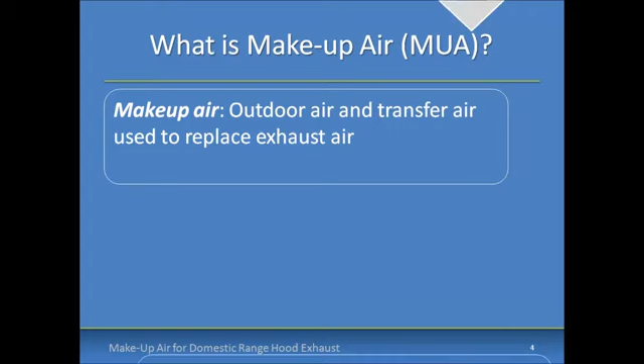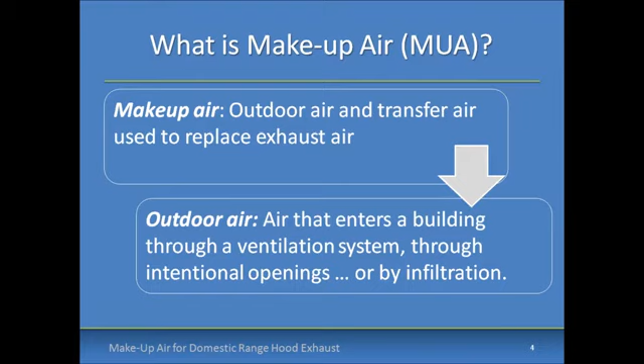So what is makeup air exactly? I'm guessing you have some understanding if you're on the call today. Based on paraphrased definitions from the 2012 International Mechanical Code, which has the most comprehensive definitions of any model code, makeup air is outdoor air and transfer air used to replace exhaust air. This leads to the next question: what is outdoor air? Outdoor air is air designed specifically to enter the building through a ventilation system, through intentional openings, or by infiltration - so outdoor air can be intentional or unintentional in its entry into the building.

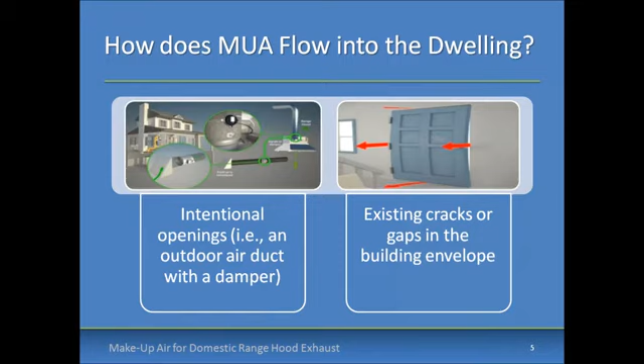When we talk about how it flows into the building, there are intentional openings, such as a makeup air damper designed specifically for this application, which could be integrated with the range hood. Then you have cracks and gaps that exist around doors, windows, and other openings in the building, where air can enter from outdoors based on pressure differentials across the building envelope. Here's a schematic of what you might see from a design perspective as far as where makeup air comes from.

That's a question we often hear.

The blue arrows here represent the outdoor air, so you can see cracks and gaps around doors and windows, and also an intentional makeup air opening, in this case located in the kitchen. And transfer air, meaning air can enter from other spaces in the house that communicate freely with the kitchen range hood and flow into that area based on pressure differentials and natural movement of air.

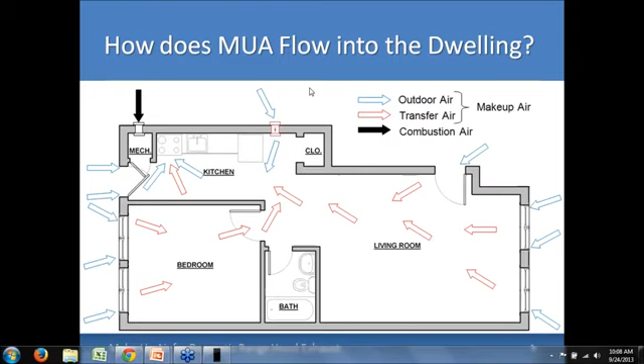I also have combustion air called out here with this black arrow directly into the mechanical room, and just wanted to point out that that's definitely different than makeup air. We want to keep those separate in general to ensure that the mechanical equipment has sufficient combustion air for its needs.

Another poll for just a second here: why provide makeup air? I'd like to see some feedback from you on this and what you think as an audience. We'll provide some more information in just a second, but before we really get into it, just wondering what everyone out there thinks are the reasons to provide makeup air.

Provide makeup air: you've got to meet code requirements. If you're a builder or contractor, you're acutely aware of that. It's important to minimize the chance of excessive depressurization, which if unchecked could lead to backdrafting of combustion appliances, extinguishing of pilot lights that might exist on old combustion appliances. Underperformance of range hoods would be another problem that could result from depressurization if makeup air isn't provided in sufficient quantity. Exhaust and sewer gas reentrainment is another one as well.

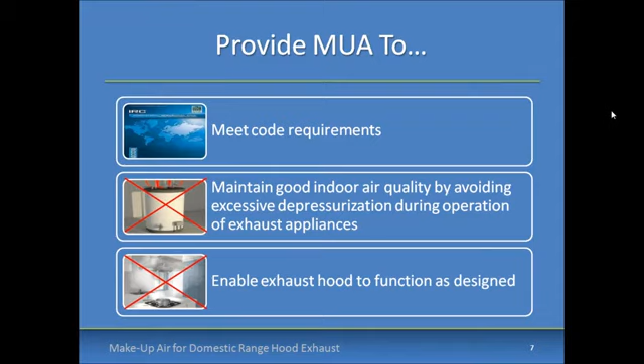So basically, we want to provide makeup air to ensure that combustion appliances and exhausts are in a good position to operate as designed, assuming, of course, that they're installed correctly.

Unless the building's exhaust and supply flows are perfectly balanced at all times, some level of depressurization is likely to occur when the exhaust appliance operates. So what we're trying to do here is not eliminate depressurization entirely, but to keep it at an acceptable level.

Based on recommendations from the Building Performance Institute, the maximum depressurization that's acceptable can be determined as a function of the type of combustion appliance. The most common metric used to measure depressurization is the Pascal. For those of you who aren't familiar with Pascals, 25 Pascals is equal to 1/10 of an inch of water column, so that gives you the conversion there.

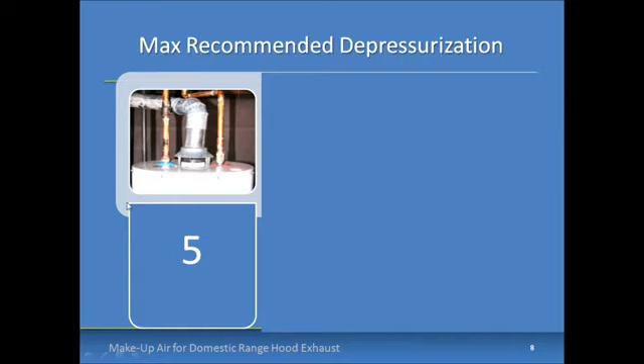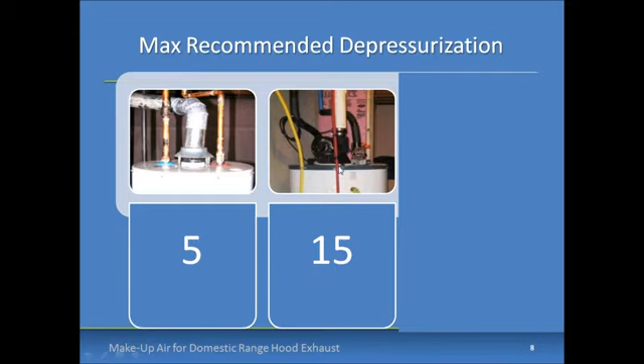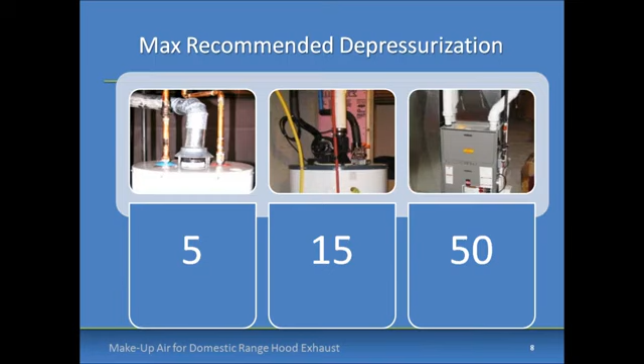For natural draft appliances, what you're seeing here on the left, a maximum depressurization of 5 Pascals is recommended. When dealing with mechanical draft appliances, like this fan assist on the water heater showing mechanical draft, a maximum depressurization of 15 Pascals is recommended. For direct vent or sealed combustion appliances, a maximum depressurization of 50 Pascals is recommended. So 5, 15, and 50 are the numbers I want you to keep in your head as we're going through this for new construction where these appliances are individually vented.

So let's get into makeup air code requirements. Within this webinar, we'll focus on the code requirements of the 2009 and 2012 versions of the International Residential Code, which is the most widely adopted model code in the nation. You can see here on this map where it has been adopted statewide. California, Minnesota, and Wisconsin have state-specific makeup air requirements that we're not going to address today, but these other states have very similar requirements.

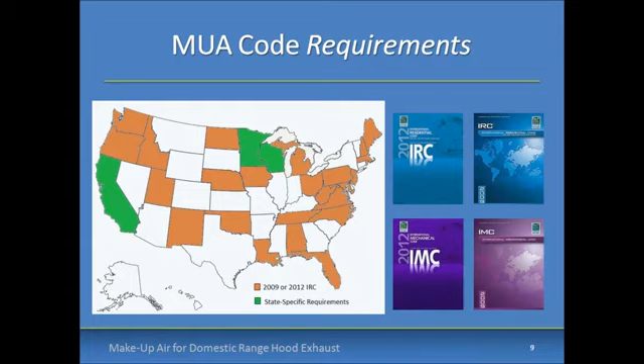The IRC and IMC, International Residential Code and International Mechanical Code, requirements for domestic kitchen range hood makeup air are virtually identical and include three basic components.

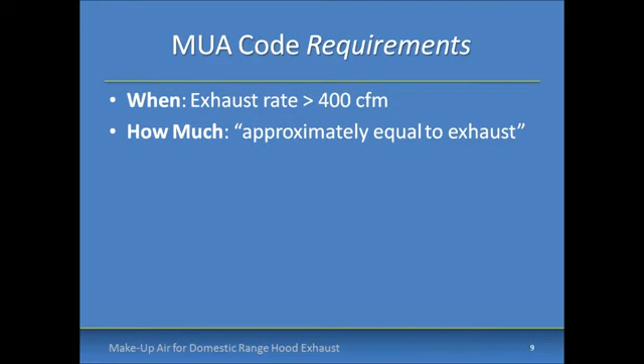First, it's when to provide it, and that's when the kitchen exhaust rate exceeds 400 CFM. They say how much to provide within the requirements as well, and that's makeup air that's approximately equal to the exhaust. And then what you're supposed to include, from a hardware perspective, is a means of closure automatically controlled to start and operate simultaneously with the exhaust system.

So that's what we're looking for here, and all of these requirements can be met by specifying a motorized damper. You're seeing a picture of a Broan solution over here in the right-hand corner, sized to provide the required amount of makeup air when open during operation of the range hood.

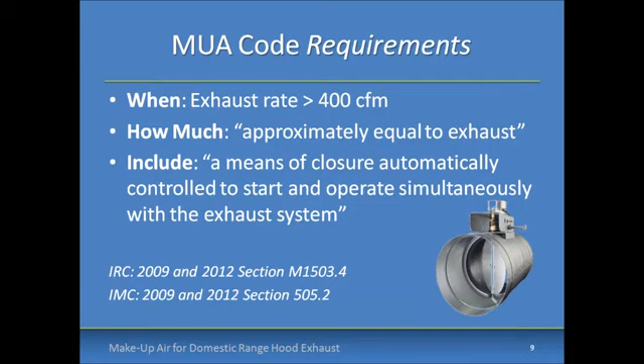So if the makeup air damper is properly sized, the solution doesn't have to be a fan-powered solution. It can just be a passive solution that automatically operates simultaneously with the exhaust system.

So let's talk about gravity dampers for a second. One question we hear from some professionals is, can I use a gravity damper to comply with the code? In short, the answer is no for several reasons. First off, they're not approved by code because they can't be automatically controlled to open with the operation of the range hood. Secondly, they're generally not listed and labeled, so it's hard to tell what pressure differentials they'll operate at.

We reviewed about 30 products from 7 manufacturers available through the nation's largest HVAC distributor's website, and of these, only 7 products were provided with data on the pressure differential at which the damper would begin to open. The average pressure differential required to operate them was 17 pascals, which is over 3 times the recommended depressurization limit for natural draft combustion appliances. So just not a good solution from that perspective.

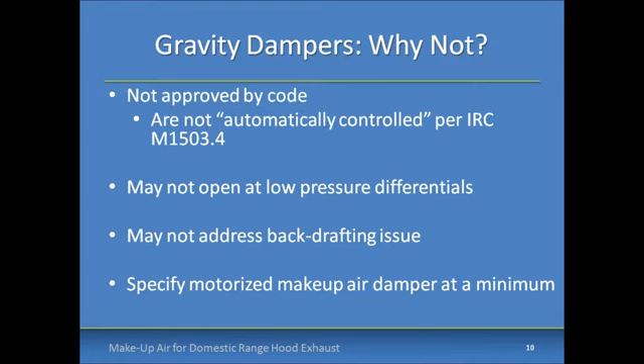And finally, industry sources like ACCA Manual D and BPI note that properly vented combustion equipment can backdraft at very small pressure differentials, like 5 pascals or less, such as we just mentioned. So backdrafting can be a byproduct of specifying gravity dampers where you're not sure which pressure differential they'll actually operate at.

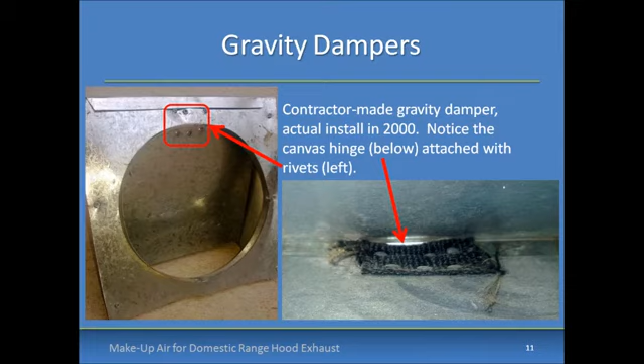Here's a picture of a gravity damper that came from a real install back in 2000. You can see the canvas hinge here with some rivets. Basically, gravity dampers can come in all shapes, sizes, and varieties. So you really can't have a guarantee that the gravity damper is actually going to open when it's needed.

Many of you are aware that while today's webinar focuses on the current regulations, we know that the codes are always changing through public proposals, which are not always for the better. Despite the reasons we gave to disapprove gravity dampers for range hood makeup air, there is a proposal to approve gravity dampers that's advanced past the first round of the 2015 IRC code development process. So if you're a code official, you can vote to disapprove gravity dampers at the public comment hearings next week in New Jersey. For the 10% of you out there that might be headed to New Jersey next week, we just ask that you consider that when you're at the hearings.

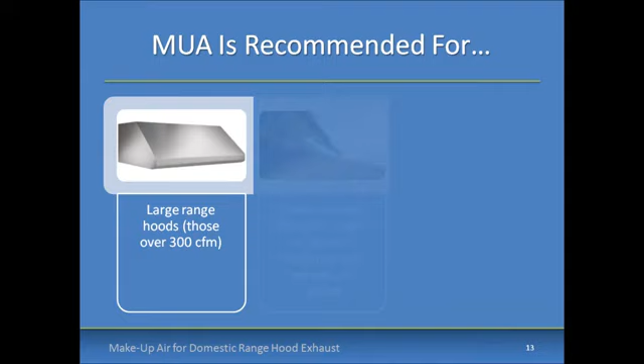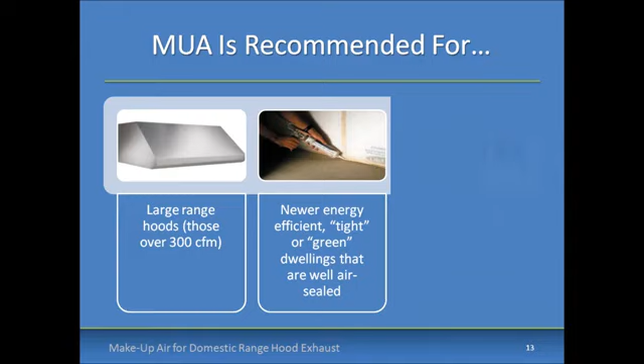So let's take a break from the regulations for a second and look at, in the case that you don't have local code that requires makeup air, what are the manufacturer recommendations for makeup air? Broan, NuTone, and Best recommend makeup air when any of these situations occurs: when the exhaust capacity of the range hood exceeds 300 CFM, if the home is considered to be of tight construction or well air sealed, or if the dwelling has natural draft space heating or water heating appliances located indoors.

So let's get into some installation configurations here, typical configurations permitted by code and options for installers. The first installation option is interlocking the central fan with the operation of the kitchen range hood and the makeup air damper. If those three are coordinated through a system of relays and controls such that when the hood turns on, the makeup air damper opens and the central fan turns on, and the makeup air duct is ducted to the return trunk of the central air handler, then you have a few advantages here.

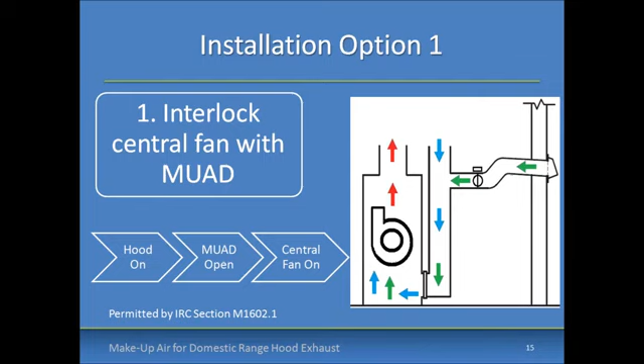You can increase the flow capacity of the makeup air damper by increasing the pressure differential over that outdoor air duct, so you're actually pulling in more outdoor air with the assist of that fan. You can also promote mixing of the makeup air, so there's a bit of tempering before it reaches its final destination in the kitchen, providing a little more comfort for the occupants, potentially, depending on the severity of the climate.

A second installation option would be to just duct the makeup air damper into the return trunk of the central duct system, but not interlock the operation of the central fan. So a little less complicated than the first installation, a little less costly, but you have less tempering at this point than you would before as far as running the air over the heat exchanger. But you do have some mixing going on of the air before it reaches its final destination in the kitchen.

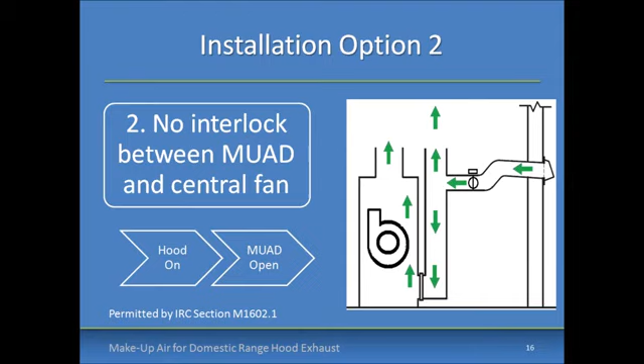A disadvantage is that less flow is provided because you don't have that central air handler to provide the necessary boost. The third installation option is routing the makeup air damper to the interior register,

and not integrating it with the duct system at all. This is the simplest code compliant option, but it doesn't have the advantages of tempering or mixing.

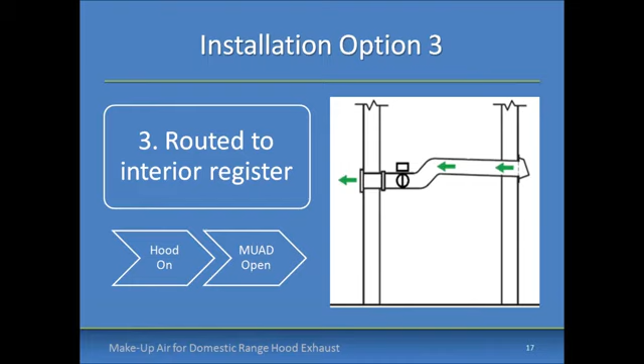If you're using this option, Broan recommends that you don't dump the makeup air right on top of the range hood, because that could result in short cycling of the exhaust air instead of exhausting the actual air that you want.

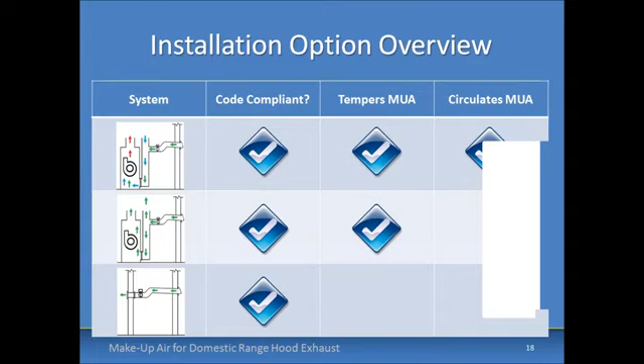So just a brief overview of the three different options that we identified and the advantages of each. You can see that the central fan integrated solution provides the most advantages, but all these solutions can be used for code compliance.

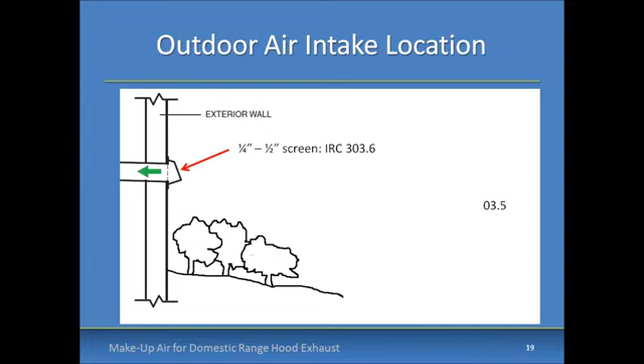Another thing to think about when installing the solution is the outdoor air intake and where that's going to be. These are common requirements within the code that address issues such as screening, clearance, and also location of the makeup air that's being introduced. So don't forget about those code requirements when you're specifying the system.

A little more involved here for you architects and engineers on the call. We're going to address some makeup air theory and building science considerations, which hopefully is of some interest to the others of you on the call as well.

When you're talking about a makeup air solution, we've seen that the code has some very basic requirements for makeup air, but we've also covered several considerations that should be taken into account in designing a makeup air solution, such as the type of combustion appliance and its ability to resist negative effects of depressurization. Is it natural draft, mechanical draft, or direct vent?

Another question is the air tightness of the dwelling. How much infiltration is available for makeup air, and how much needs to be provided through dedicated openings through the building envelope? What about the installation configurations and the boost that you could get through integrating this with the furnace?

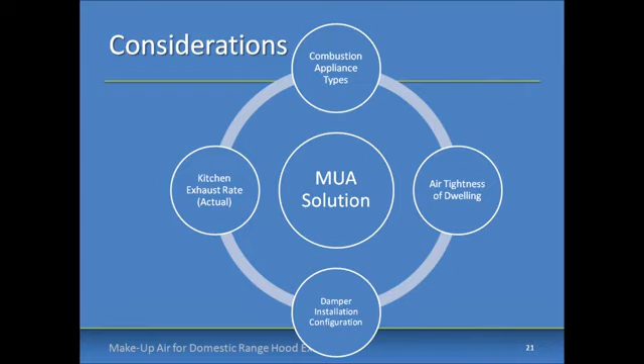And the actual kitchen exhaust flow as opposed to the nameplate rating. The fan may be rated, let's say, at 1,000 CFM, but once you get the ducting in and all the elbows, you might not be providing that total flow.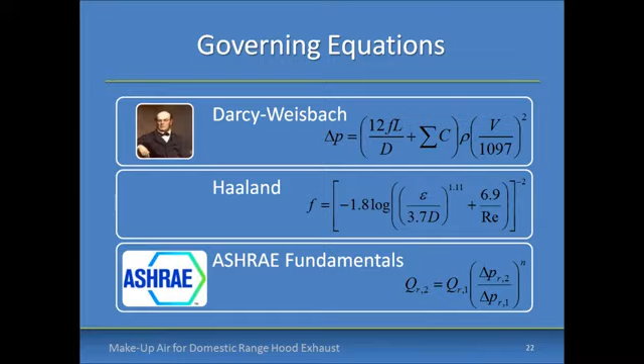All you have to know is that the Broan makeup air tool uses these equations so that you don't have to. However, if you're an architect or engineer and want to size these ducts on your own, you can reference ASHRAE fundamentals, and they have a lot of great equations that can be leveraged. But just know that the basis for this tool is grounded in engineering design.

So let's look a little more at the Broan and Best Makeup Air Specifier tool, which is a proprietary tool for Broan, Best, and NuTone products, but can also be leveraged for other kitchen range hoods from other manufacturers for code compliance. I'll get into that a little bit later.

One of the most difficult parts of complying with the makeup air requirements of the IRC is sizing the makeup air intakes, and then, of course, demonstrating to code officials how the designed makeup air flow is approximately equal to the exhaust flow. So Broan, NuTone, and Best have developed a freely available online tool to help building professionals with this step.

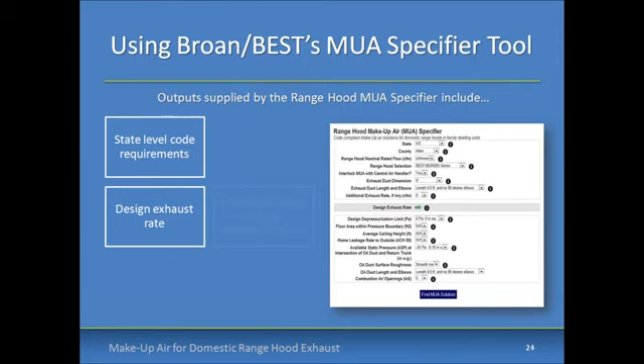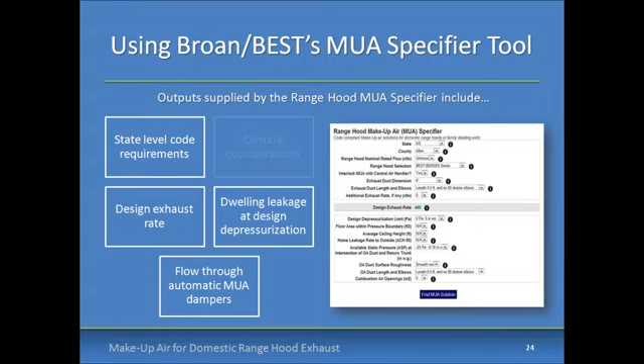The tool overlays the engineering equations that we saw earlier with user-specified design criteria, and a state-level code adoptions database is integrated as well. With all this overlay and engineering design, we can develop specific code compliance solutions with rich outputs and documentation. So all these considerations go into the tool.

So right now we're going to step out of the presentation for a second, and we're going to step into the makeup air tool.

You should be able to see now Broan's homepage on your screen. From this homepage, you can select on the top toolbar, Specifier Tools. I'll go ahead and select that. On the left-hand side here, you see the Makeup Air tool is an option. There are a couple other tools that Broan has as well for code compliance of mechanical ventilation systems.

This is called the Range Hood Make-Up Air Specifier, and you see a lot of legalese and introductory text here about the different systems, just a background on the tool, kind of a primer on what it's supposed to do. But we'll skip that for now and just go ahead and select the state that we want to design in.

I'm selecting New Jersey in this case because that's where the code hearings are in another couple weeks, so we'll try to get a solution that's directly applicable for New Jersey.

As you go through this tool, you'll see these eye icons, and these are informational icons that you can select to get more information on the specific input to figure out what exactly the tool is asking for here.

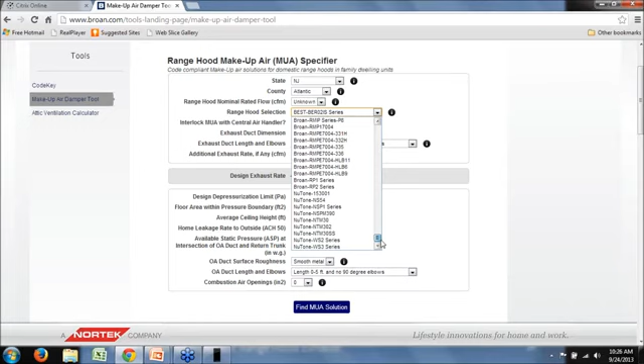As soon as you select a specific flow, then this drop-down will repopulate and give you the relevant models within the Broan, NuTone, and Best line. So let's just go ahead and select one of these models.

You can see as I'm doing this, this design exhaust rate bar is updating the whole time. And I've selected a 600 CFM model, but the design exhaust rate is 390 CFM. So you might wonder, well, how is a 600 CFM range hood only exhausting at 390? And that's basically because of the default exhaust duct dimensions and layout that are given here.

If we go ahead and provide more realistic exhaust duct dimensions that might be used by a contractor when it's installed, you can see that the design exhaust rate is recalculated here in the tool based on the specific fan curve of the model being selected.

So if we want to maximize the flow rate, I've gone ahead and selected 10 as the exhaust duct diameter in inches. And you can see that we're up to 570 CFM based on this length and number of elbows.

You can, of course, change this, and as you change the length and number of elbows, you can see that the exhaust rate is going to fall with more elbows and more length.

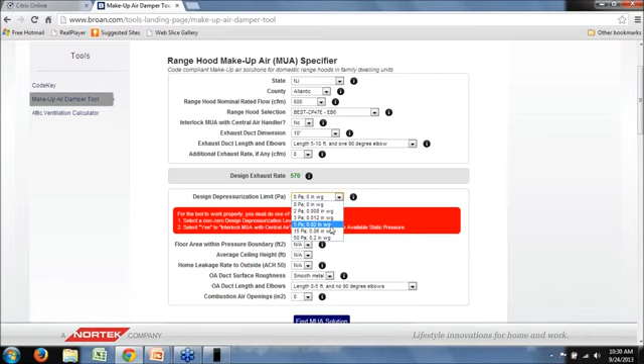So let's go ahead and select a non-zero design depressurization level. And if you recall before, we had the 5, 15, and 50 as the 3 major choices. Let's assume that we've got a naturally vented water heater, so in this case we'll select 5.

If you don't recall the guidance provided before, you can hit this information icon and see that these are the BPI recommended depressurization limits based on the type of combustion appliance. So that resource is always available for you.

Next, we want to enter the square footage. Let's say it's a standard new construction, about 2,500 square feet, with an average ceiling height of about 9 feet. These inputs matter because they tell us how much infiltration is available through building leakage. A measure of infiltration is the ACH 50, the air changes per hour at 50 pascals. You can get this number through a blower door test, or if you don't have it, you can make a conservative estimate. I'm going to choose 3 ACH 50, assuming it's an energy efficient, tightly built home compliant with the latest 2012 energy code. So we'll go ahead and select 3.

Then we have to know the characteristics of the outdoor air duct. Are we using flex duct, or smooth metal duct? That makes a difference on the resistance to airflow through there and how much air you can actually expect to get. So again, a lot of engineering calculations go into this tool. We try to keep the inputs as simple as possible. Seems like a lot the first time through, but once you go through this a couple times, it becomes pretty routine.

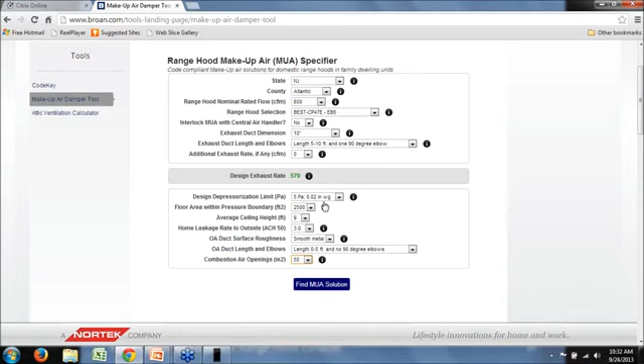So let's go ahead and take a look at our solution again. We've got a 600 CFM range hood as our input. This is exhausting about 570 CFM, which is what we're expecting based on field conditions. We're saying that we'll let the building depressurize to 5 pascals, and we've got our parameters entered to figure out the infiltration contribution. We've got our combustion air openings entered as well.

So now we'll hit Find Makeup Air Solution. And as you can see here, this is not going to be a palatable solution for most builders or contractors out there, if you're looking at 5 8-inch dampers to provide the makeup air required. The good thing about this tool is that you don't have to stick with this number. You can go back and change your inputs to come up with a more acceptable solution.

Based on the tools we have here, one of the biggest changes we can make is to first interlock the makeup air with the central air handler. Let's go ahead and say yes to that. If we interlock it, we know we can get more flow through, so we need to estimate the available static pressure down here at the intersection of the outdoor air duct, or makeup air duct, and the return trunk. Basically, how much suction do we have when the fan's operating that we can rely on to provide this makeup air? Let's say we have about 0.15 inches water gauge, or 37 pascals, available to pull that air through.

If we keep everything else the same and hit Find Makeup Air Solution, you can see that we're down to 2 makeup air dampers required for this solution, and those would be 2 8-inch dampers.

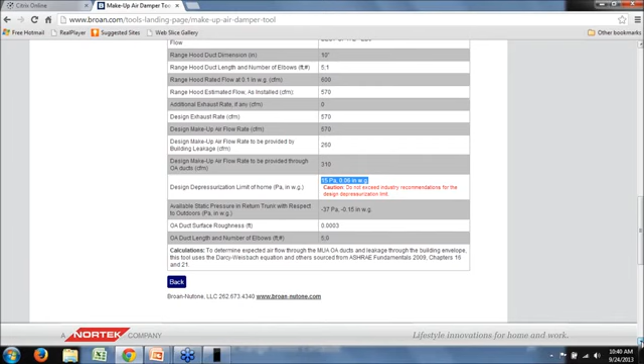So very detailed information to show how much infiltration is assumed, how much of the makeup air comes through the makeup air duct. Even the assumptions related to the available static pressure and return trunk, the duct roughness, etc. Rich information here for the code official to verify that a thorough design has been conducted. There's a print option here as well, and this will take you to a PDF that you can print out and present to the code official. It's just 2 pages here, so fairly concise with a lot of great information there.

So at this point, we've gone through an example of the operation of the tool, and just want to take a break for a second here and get another poll underway to figure out how helpful this was for you. So we'd like to figure out, based on who you are and what situation or where you come from, how helpful this webinar was for you. And we'll be able to run the analytics later on to be able to figure that out.

Looks like we got about 50% response so far, and about 50% of you are saying that it's very helpful. Got about 10% extremely helpful, and about 30% are coming back with moderately helpful, and at least 1% of you, this is complete review and it's not at all helpful. So you must be very familiar with all this process.

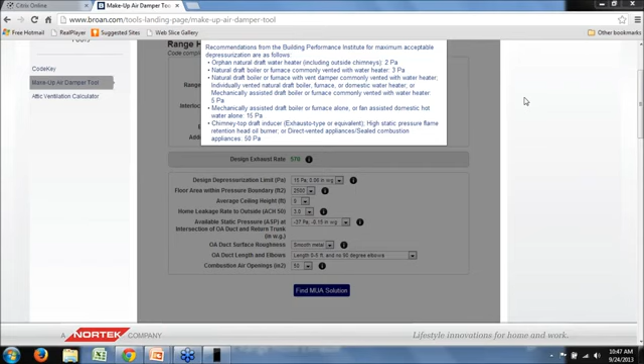Number one could be addressed through this additional exhaust option available within the tool. That's another great suggestion. As for practical considerations for tight homes with open fireplaces, if they're open, depressurization can result in entrainment of either combustion products or particulate matter in the flue. Those are considerations the designer should take into account when selecting the acceptable design depressurization limit.

Got a question from Paul Raymer: how does the exterior hood or termination fitting work into the design exhaust rate? The tool assumes a constant value for the equivalent length for the end cap. We had to make a call on how many inputs to have and what assumptions to make. While there is definitely a difference in the performance of the exhaust caps and the flow they let through, we decided to go with just a standard assumption. So there's a standard assumption for that integrated into the tool that's basically hardwired.

Got a question from Alan: how does the tool interact with HRV and ERV systems? HRV and ERV systems are typically considered balanced systems, so they should be able to provide the exhaust and supply streams they're rated for. The higher the depressurization of the home, the harder the HRV or ERV has to work to overcome resistance on the exhaust side. On the supply side, they might actually receive a boost if depressurization helps draw more air from outside. The tool doesn't specifically say you should tweak your HRV or ERV this way. I'd assume it would have some impact, but we haven't quantified that at this point.